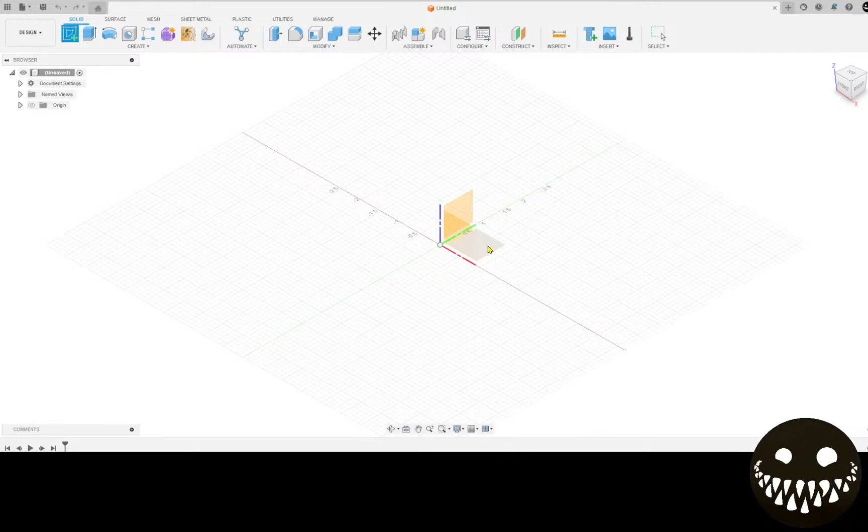of the X's showing. Alright, we're going to just go through adding some text to some flat planes in Fusion 360 here. It'll kind of cover all of this. Alright, yeah, we're all up to date. Perfect. We'll start by creating a sketch in the XY plane.

And, excuse me. Of course, as soon as I start talking on the mic, I get all choked up.

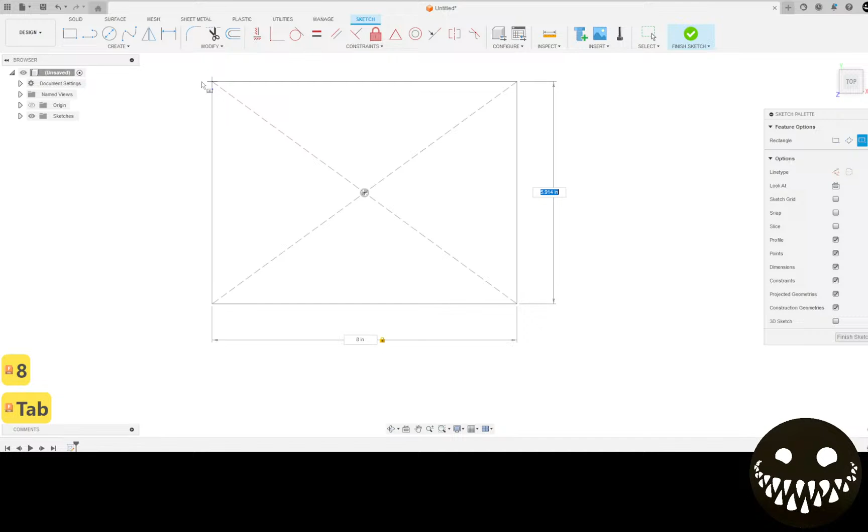I'm going to do a rectangle and then go over here into my sketch palette and use center rectangle just to create a box. I'm going to use some random numbers, 8 by 6. You can see my keystrokes are highlighted on the left hand side if you want to see some of the hotkeys I'm using.

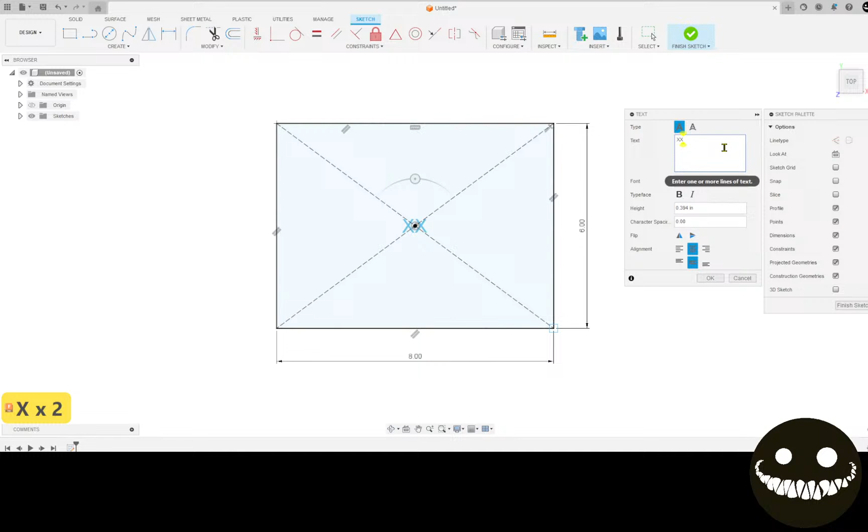Under create, I'm going to go to text. I'm going to put that over top of this. And I can center that text. And we're going to go XXX. We're just going to use Arial. Let's make the text height a little bit bigger, and give it a little bit of spacing. Perfect.

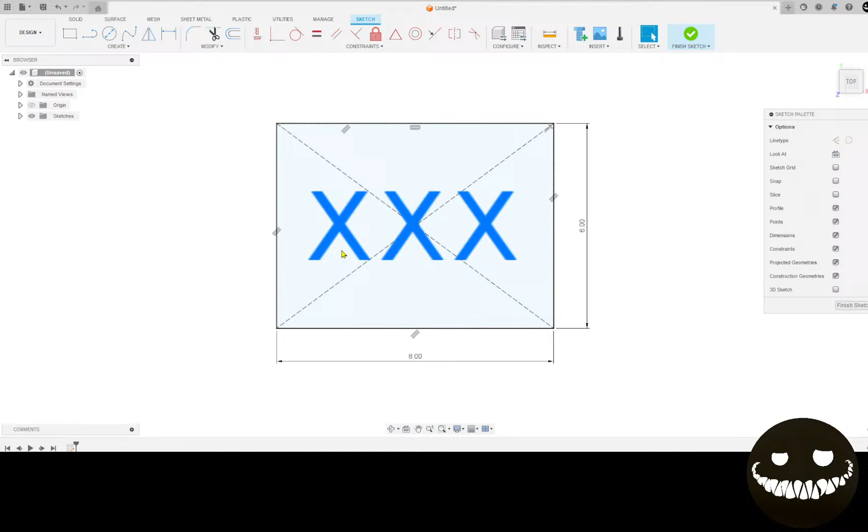Okay, so there's a few different ways you can go about this, depending on whether you want to be modifying this or not. Let's do one method to start with, which would be right-clicking on here, explode text, and you can see they show up in green, which is locked sketch lines. We can unlock those lines by selecting all of them and using the fix/unfix tool. Sometimes it doesn't do it the first round and you need to use that tool twice,

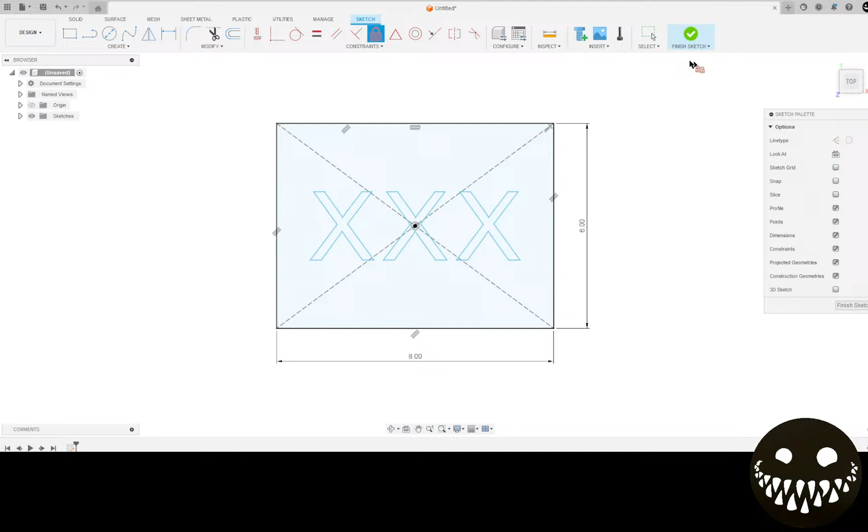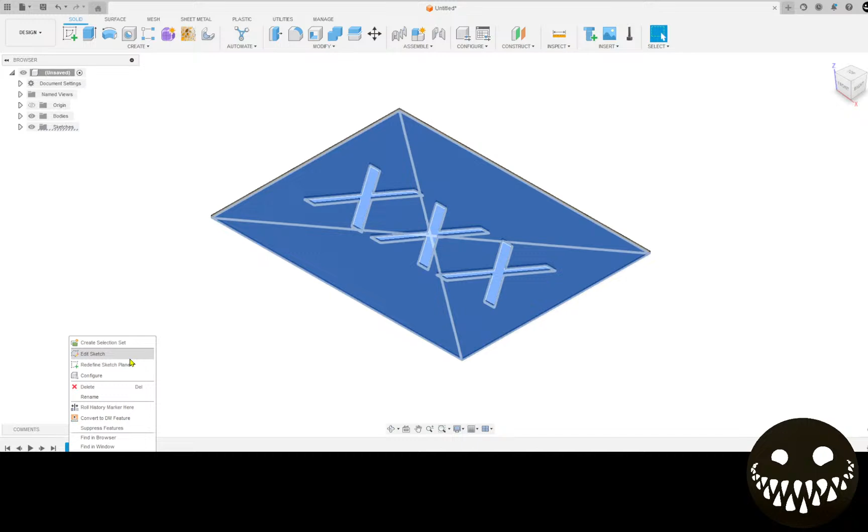and from here you can manipulate everything you would like, or it's created a solid profile that we can now hit E for extrude and extrude to the thickness of 14 gauge, and that works out for this font. The one disadvantage of doing it this way is that you can't change that font easily later, because if you go back to edit sketch, it's a shape now, it's not a font menu anymore.

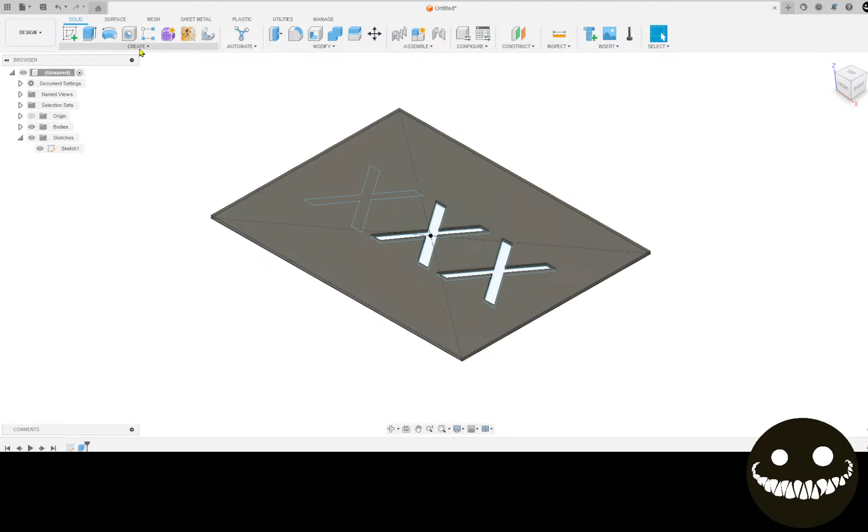Alright, so let's say I'm going to finish this sketch. Let's say one of these didn't show up for some reason. You can go back into your sketches here and you can either edit, or you don't need to edit it, but you can make it visible so you can see it. And now you can go into extrude here at the top left, or you can hit E for extrude.

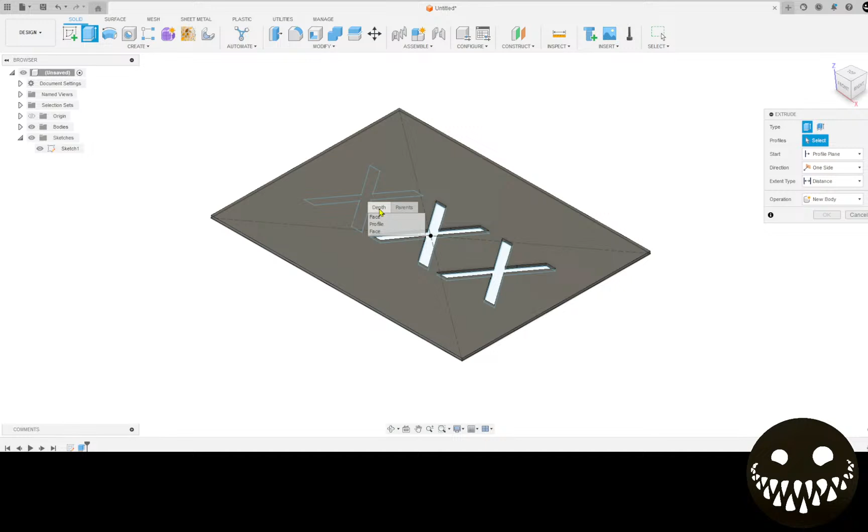And now, because that's at the bottom plane and the body is actually between you and that sketch, you can hold down left click for a second and it'll bring up every layer that's in between you and infinity. So there's the face, the profile, and the other face for the bottom side. So we want the profile, and now we can extrude that through in a number of different ways. But oops.

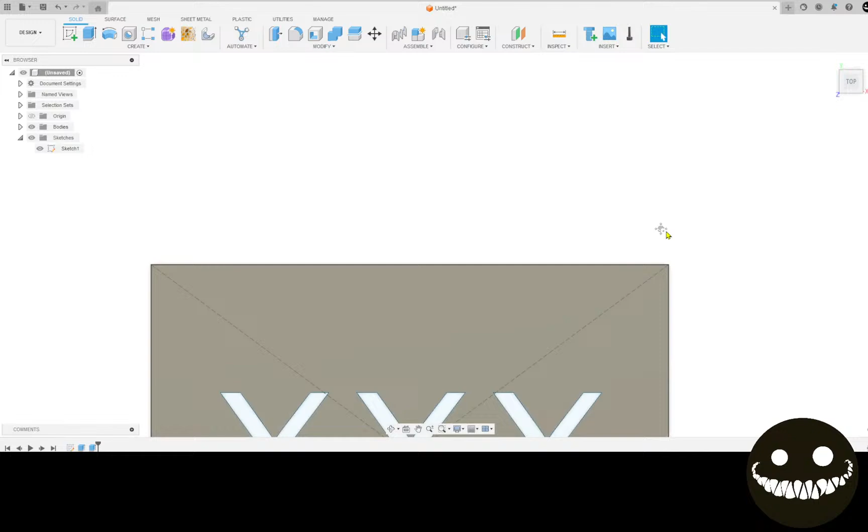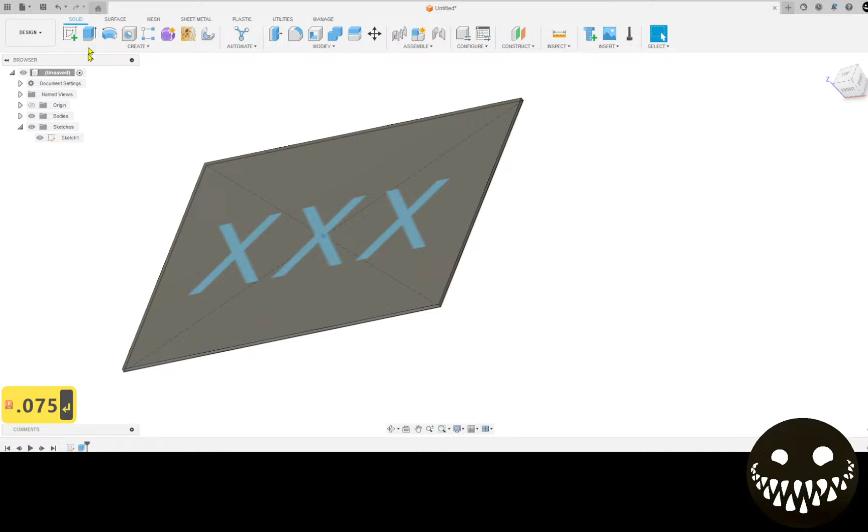All right, so another option we have here is we're going to go back in time, back to just being sketch text, and we can extrude this body to the thickness of 14 gauge. We can look at that sketch again. Now we can hit extrude again, and again we can hold down left click and it brings up the option for sketch text.

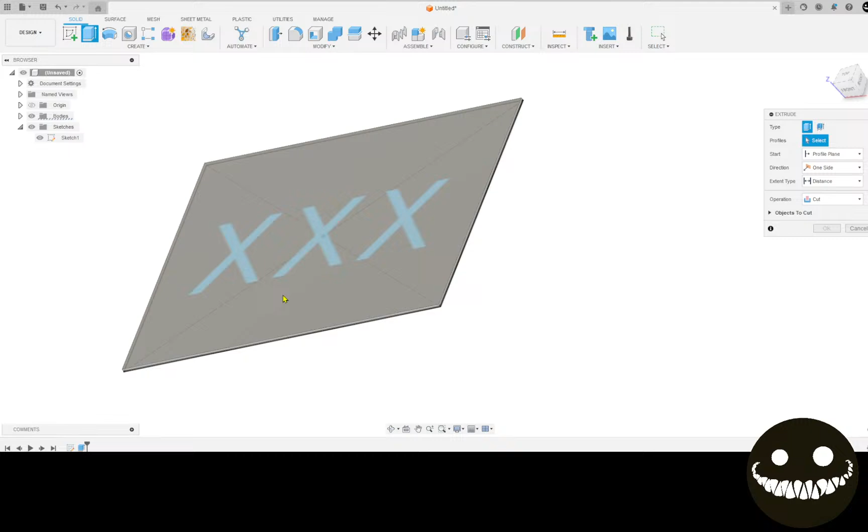Alright, and under operation we're going to do a cut. Oops. Not two profiles, I just want the sketch text. Oh, come on. Anyways, I'm having a fight here with this now. Sketch text. Target body, no target body found to intersect. I keep accidentally selecting the other one. Anyway, sketch text. I don't know why it's going down, but we want to go up.

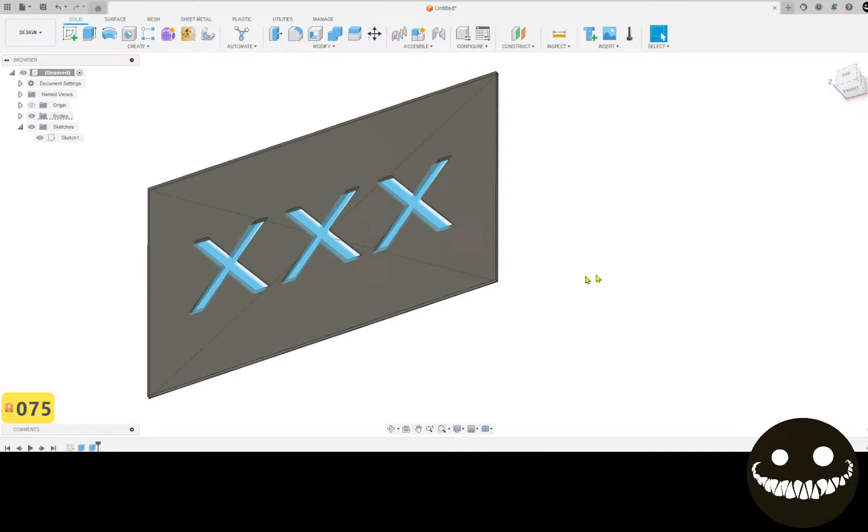Now, the advantage of doing it that way is now we can go back to the sketch menu and we can double click this and it's still text.

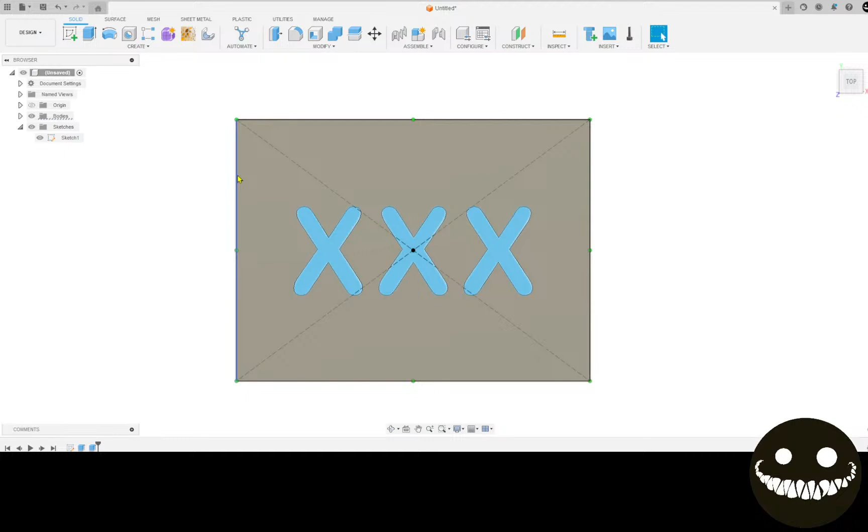So we can now go through and let's say scroll to Arial Rounded. We'll finish that sketch and it has updated this now to that Arial Rounded. If I go back again, go to edit sketch, double click on this and switch it to whichever I feel like, even one of the stenciled ones.

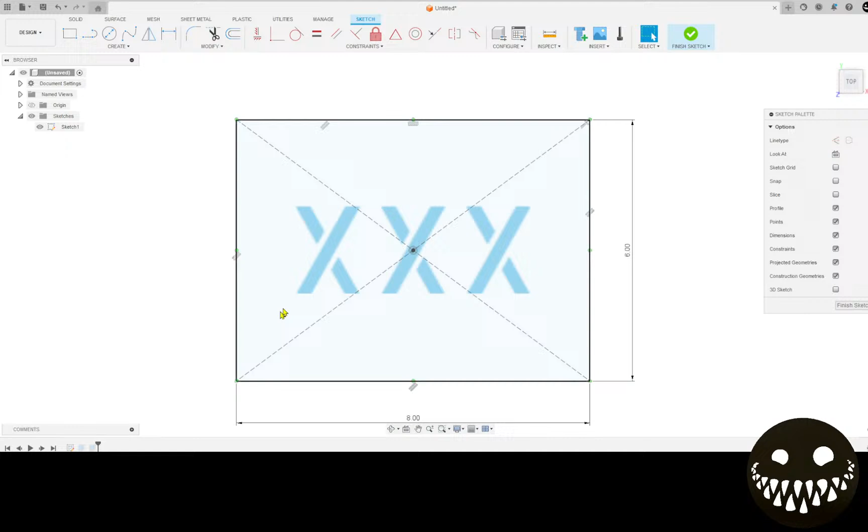I know it's ironic to stencil the X, but that's a huge advantage of doing it that way. You could go in here and you can change the height and it's still going to keep updating

because it's text, not objects or sketch objects. Perfect, and we might as well just run through it from here. So let's say we now went to manufacturing, going to make sure we're in the fabrication tab. We're going to start a new setup, and our setup is setting up our relationship between the material, which is the golden outline here, and the work being cut.

Or I should say the work and the object being cut. So right now our home point for this, which is different from origin on the model, this is our origin in relationship to origin in between the machine and the work and this project.

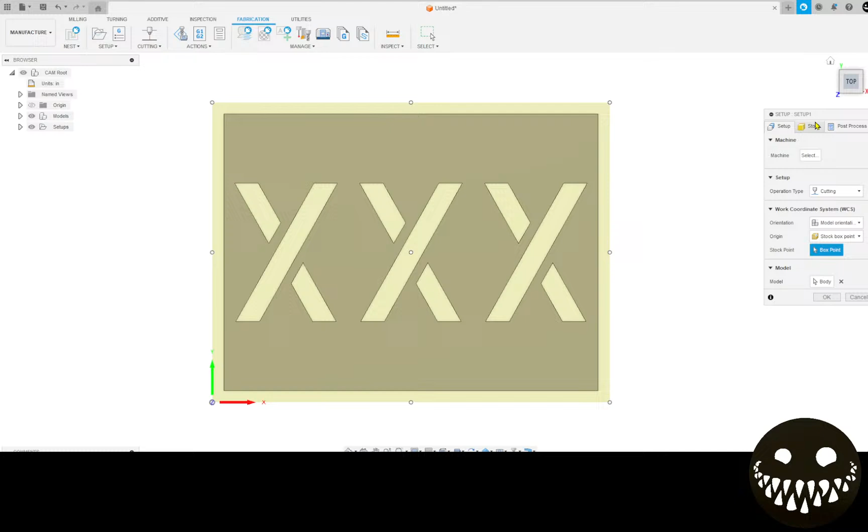So usually for Langmuir we're in the bottom left hand corner, and there's a few options under stock. Like right here I have an automatic offset from that corner of 1/4 inch, but you could set it right to 0 if you have some kind of indexing. That'd be fine. And this is where you can also add a name that'll come out in your G-code at the end without having to remember to re-enter it.

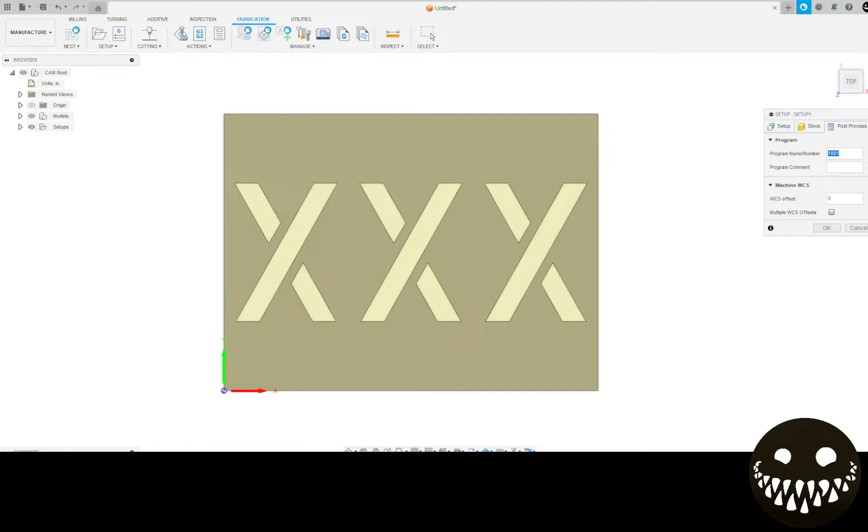So you could go for example here. Perfect. So now I have that in my setup. I can go up to the 2D profile, and this is where I'm going to be selecting cutting tools.

I guess I could go through making one up. Let's go into our local library that's on our computer. And I have all sorts of different tools in here, but let's create one from scratch by using this plus icon. I'm going to go down here to cutting plasma.

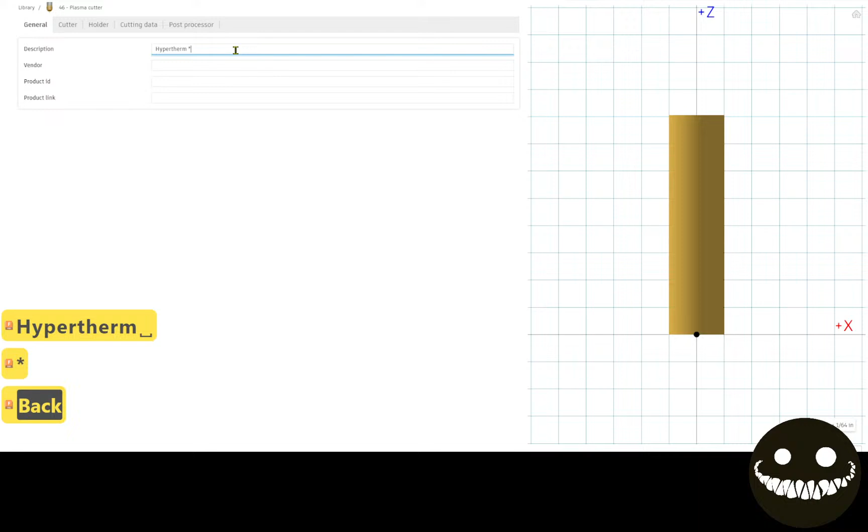And there's only so many actual line items we need in here, but let's say it's a Hypertherm 85. And actually I'll put it in front of here. We're going to be using 45 amp standard consumables, standard. I don't know what that means.

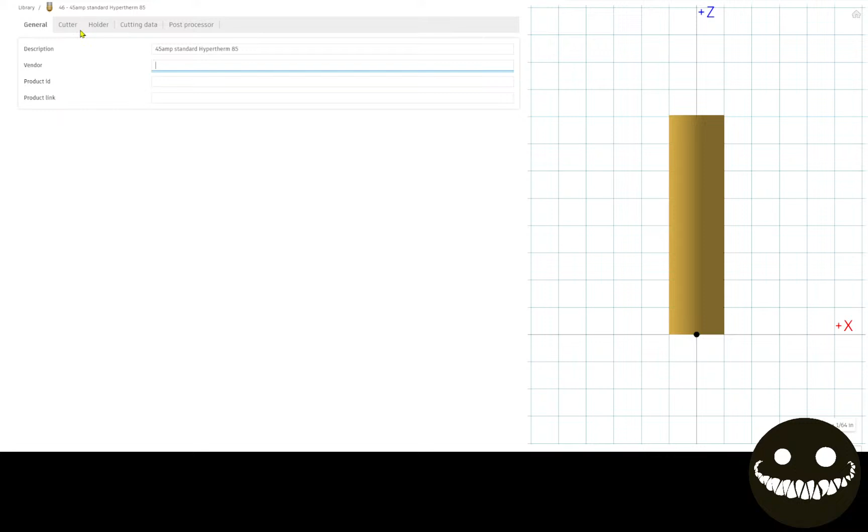And we really don't need all this stuff. You could put it all there if you're reordering from the same place or whatever. Okay, for nozzle diameter in the Langmuir instructions, they do say 1 inch, which is, I think it's basically talking about like the barrel from here to here on the torch. We don't want that because the simulation in Fusion 360 picks up on that for some reason since an update last year.

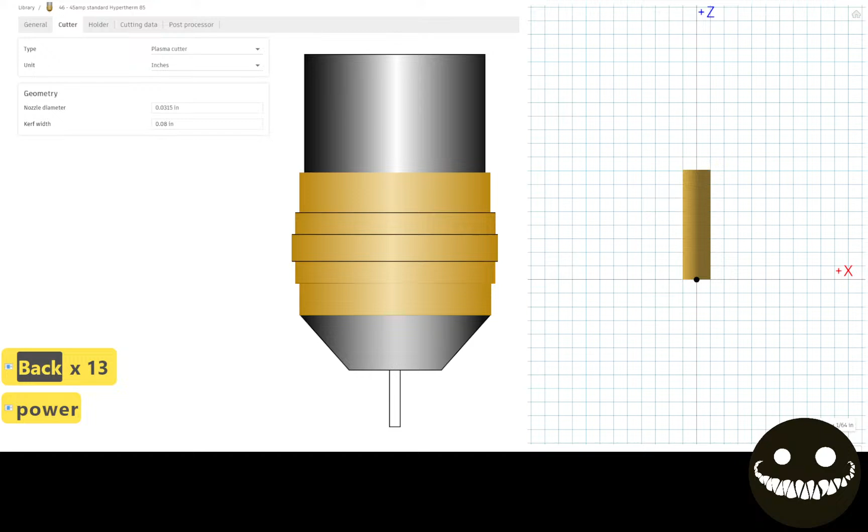So we're going to just put in whatever the kerf width is. So let's grab that manual. I happen to have that manual on my computer.

All right. So let's get down to the cutting charts. And let's say we're cutting this out of, well, we already said it's 14 gauge, but let's find that here. And we'll set that up.

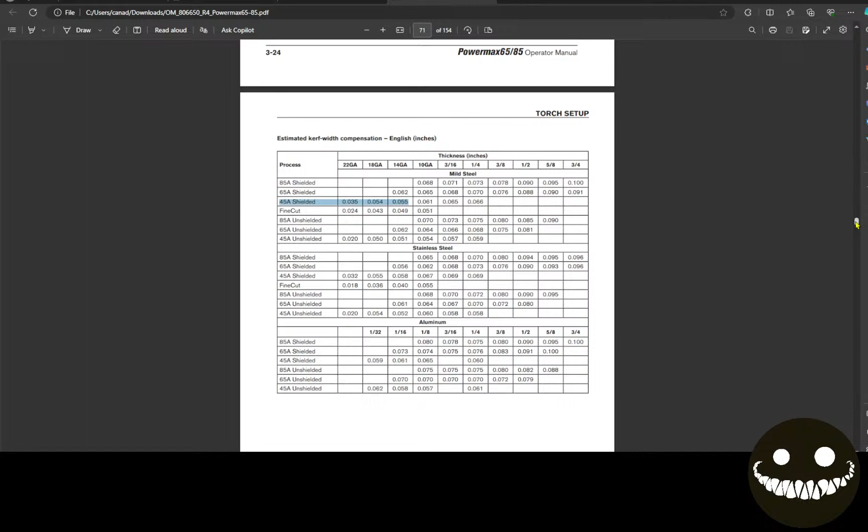All right. So these are our estimated kerf widths. We're going to use 45 amp, let's say shielded consumables, I think that's what we wrote there. It is 0.055 is kerf width.

And we'll actually just scroll down to the cut chart, which is right here for mild steel. And this is the line we'll be looking at here. We'll just refer back to that in a second. So 0.055, because we'll make that nozzle diameter the same as kerf width, 0.055.

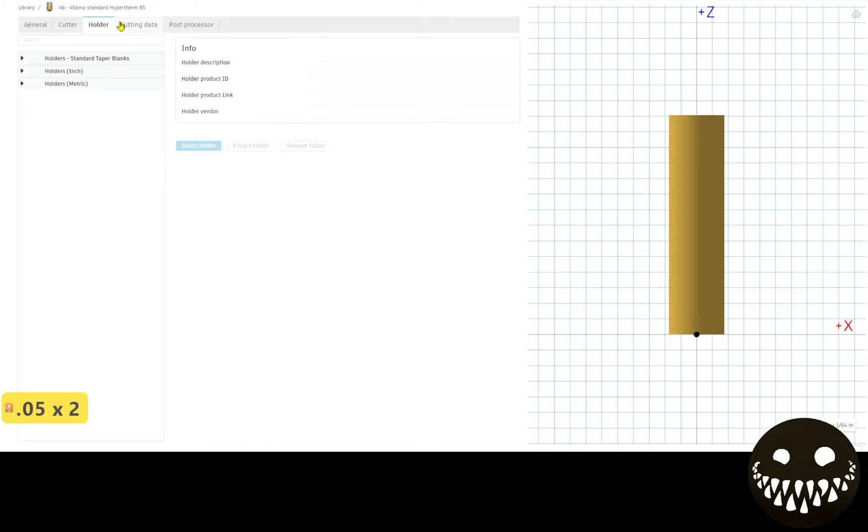Holder, we'll just leave everything the way it is. Under here, we can put in our feed rate and some of our other recommended information. Let's take a look again.

So it does show our torch to work distance or our cut height. It shows our pierce height here, our pierce delay. There is a difference between, I think the XP is a little faster latency wise than the Pro. So usually you start at 0.5 with the Pro. It says we can do 270 inches a minute and our voltage is 130 for that.

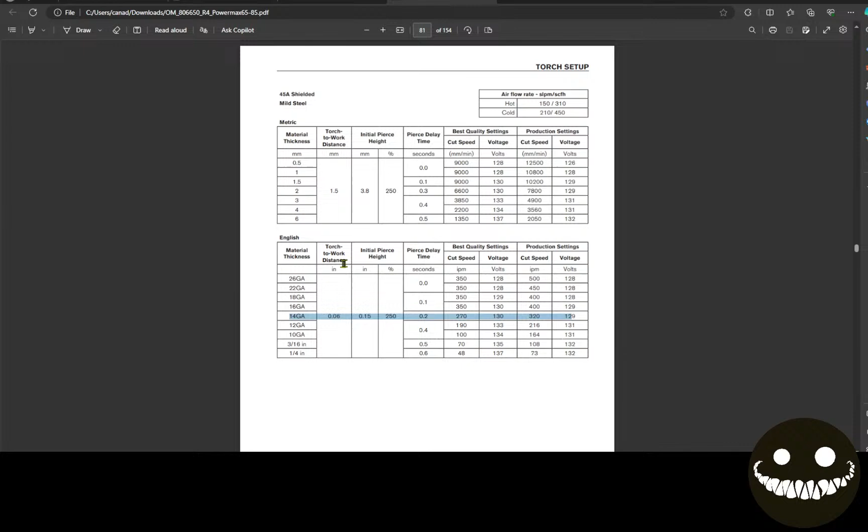So let's go back to Fusion. I'm going to put in our cut height, pierce height. These numbers actually don't move forward right now, you'll have to re-enter them at the end. But one day if they do, then you won't have to be messing around with your tools. And it's easy enough to just put in there.

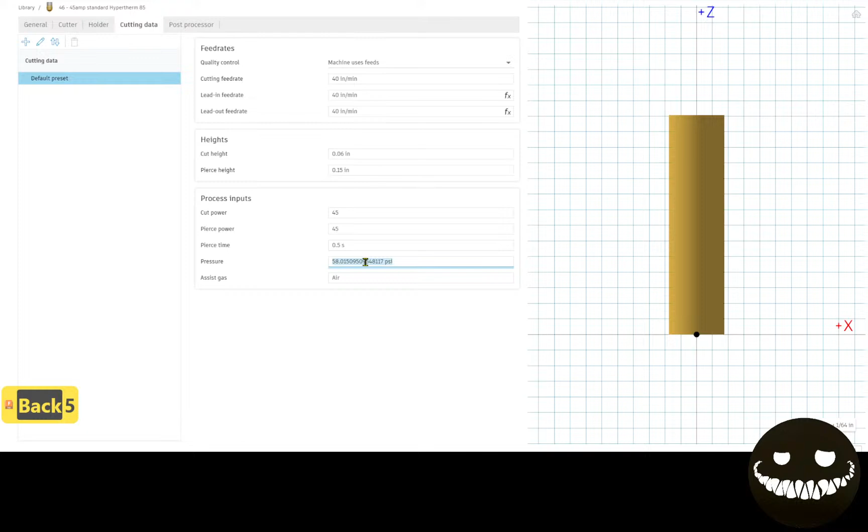I'm just going to put 0.5, 85 psi of air. And this post processor is basically just the tool number, and we don't mess with any of this. And we're going to say accept. So there's our new tool. I actually got the feed rate wrong there, so I'm going to actually go back in there and edit it.

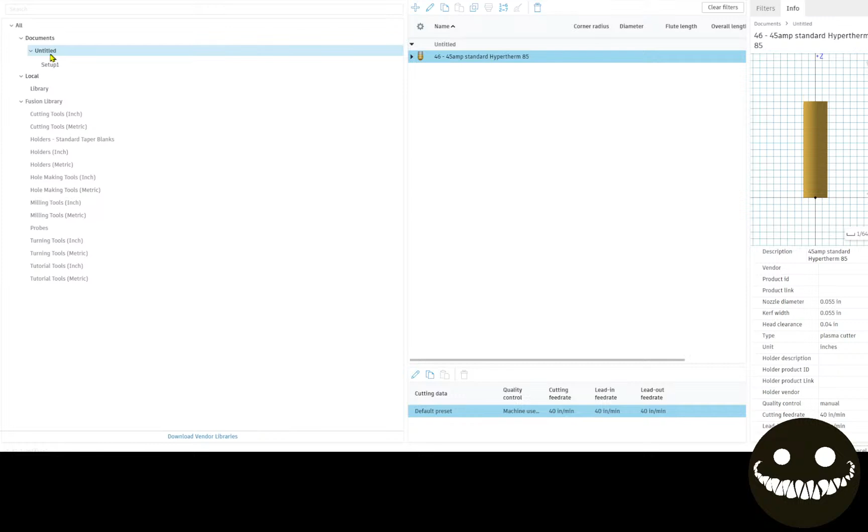Alright, so I'm going to cancel that because I'm actually editing the document version of that, which is attached to that setup. I'm going to go back and edit it in the library itself.

I should put this at 270 while I was here. All right.

Now I can simply click this face, the face contour, and it will know to select all the inside and outside without being on the wrong side.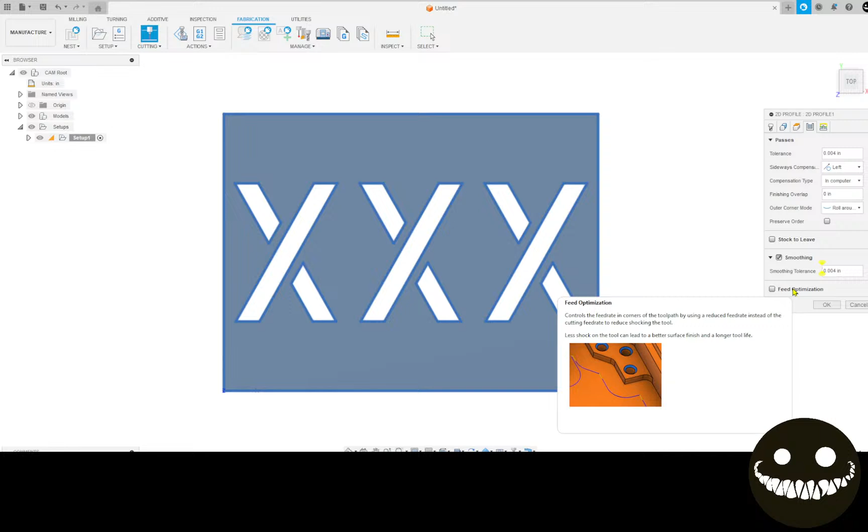Now I like to always reduce the tolerance by 1, add some smoothing. We're not going to do any feed optimization right now, but that's where it adjusts the tool path feed rate to have the torch be able to get the finer details of corners and such. It shows an illustration, basically with milling, but it shows an illustration of kind of how it works. With this, we're not going to need it.

So let's go to lead-in radius. Just put a small one on here. I'm just doing kind of a minimal lead in on these. All right, and this is preferred lead in position. So if you had a back part, if this was going to be a bottom that you weren't going to see, you could say, hey, I want the lead in to start there.

Let's add feed rate optimization just to go through that. So this is like the maximum deviation angle. It will apply feed rate optimization to it. So obviously this is well over 25 degrees, so it would start slowing the torch down before it hit this corner.

And how is the best to explain that? As the column of plasma is moving, or the arc is moving through the material, from where it enters the material at the top and where it exits the material at the bottom, there can be a little bit of lag there. The lower portion will always be at least under or trailing the upper position of where the torch is. So the idea of the feed rate optimization is it slows it down so the lower trailing edge of it can catch up, and it can be more perpendicular before making that more significant change in motion.

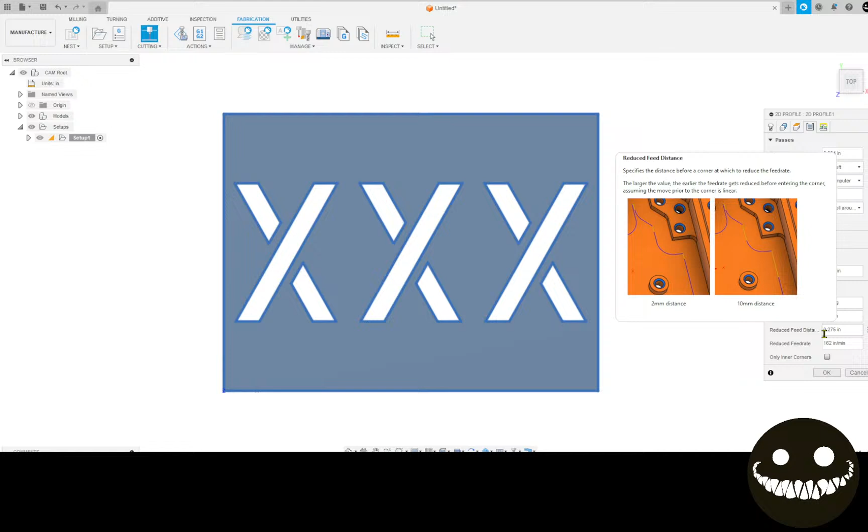So these are just some of the constraints for that. One is the maximum direction of change. One is the maximum reduced feed rate for this kind of radius. And then the distance, how much do we reduce that feed rate? So like the length before the cut, it starts reducing the feed rate, so the column of arc, or the plasma arc, can become more perpendicular before making that change. And then the amount of feed rate reduction you want, and typically it's about 60%.

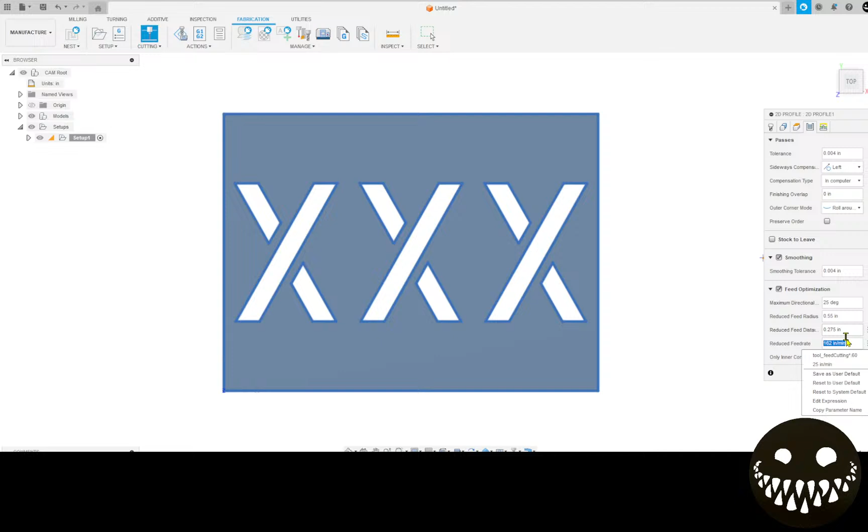I wrote it because you can write formulas in these just like you can in Excel. So I have mine as cutting feed, or tool feed cutting, times 0.6, so 60%. So it reduced it from 270 to 162 automatically. So if I made slight changes with the other one, it would update this one with that rule in mind. But you could write in a predetermined amount as well.

Okay, so we'll move to linking. I think we went through all that. Let's process this. So it's made us a toolpath here. And then if we go and look at a toolpath...

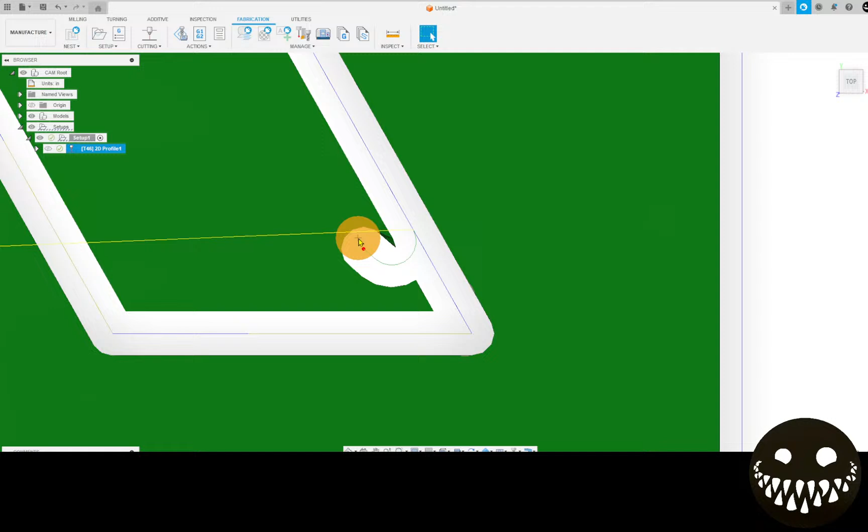I have no idea why, for some reason in my head, the beginning should be a green dot and the end should be a red dot, like start and stop, but it's not how it is in Fusion 360. It is red dot to start, because that's the way Fusion 360 likes to do it. So it's showing this green line to start with, which is the center of our cutting path.

This circle and this swarf here, or kerf here, represents the kerf. And this green line is the lead in. So this is the lead in length to here. This is the lead in radius. And I did it a radius of 160 degrees. And I did that small little lead in and then the lead in radius. And this is obviously the radius that it's coming in. And now the blue line is standard rate of motion feed rate.

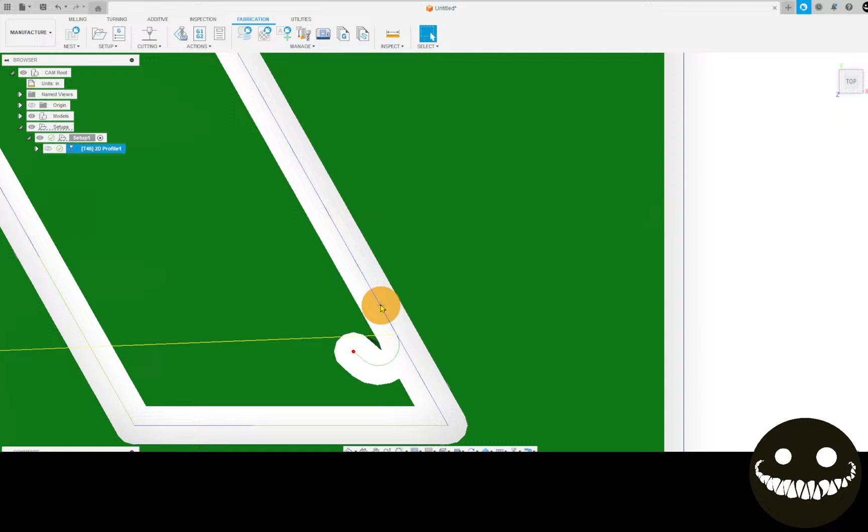You can see our actual cut line is on this side here, and how it compensates for where its travel is against that to make up the difference. That's why the kerf width is so important. So it's going to go around here, and now we can see our reduction.

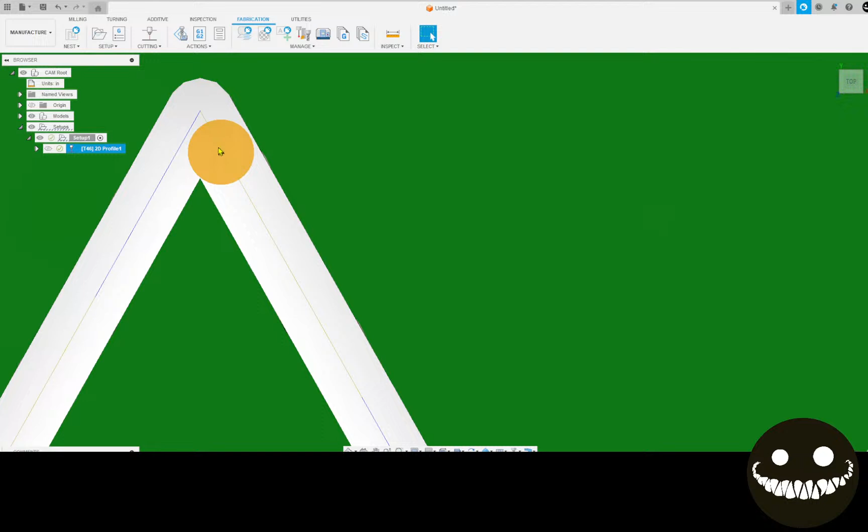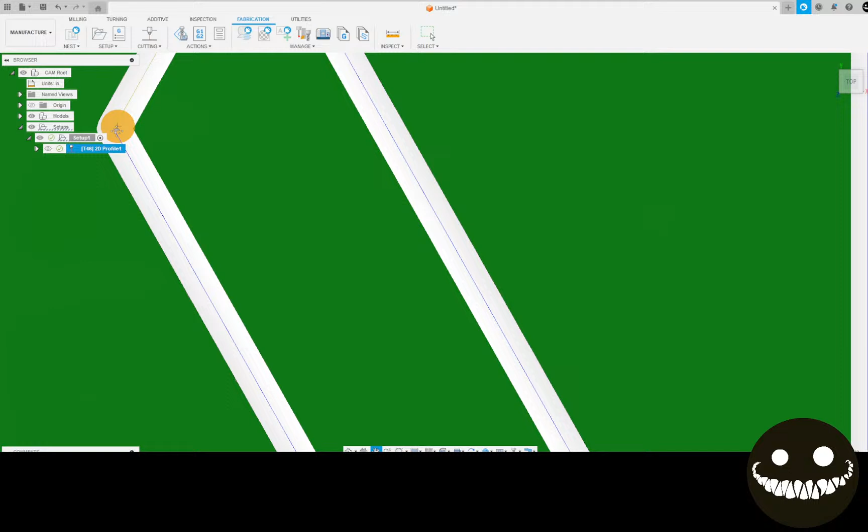This was that 0.275 inches of feed rate reduction. So the torch will start slowing down here before this corner, and then as soon as it gets to the corner, it goes automatic full speed again, that 270 inches per minute. And now right here it slows down to that 162 of optimized feed rate. Now once it gets to this corner here, it does the same thing, slows down, speeds back up.

Sorry, that phone threw me off there. Now just before this corner, it does the same thing again at this corner, applying that feed rate optimization.

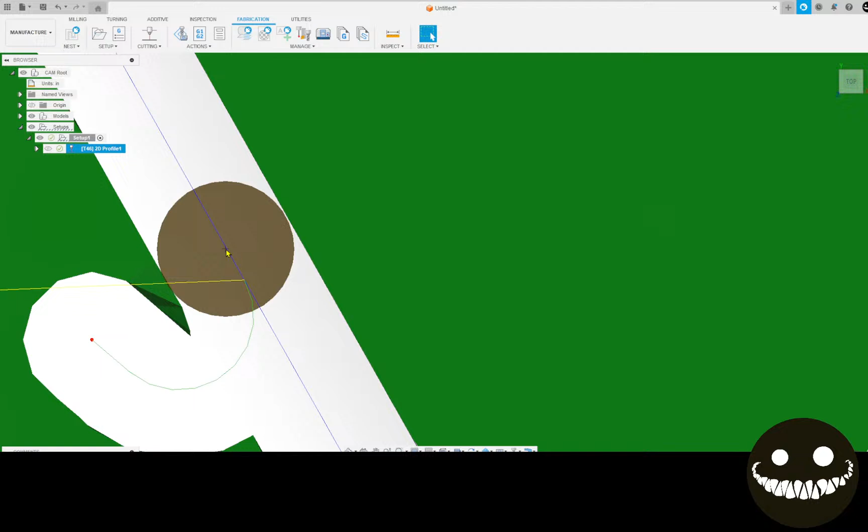Oh, I didn't do a finishing overlap, but you can have it cut a little beyond the starting point or the first entry point of the cut into the finished material, which helps smooth out this little area here, which I probably should have added. I'm going to go re-add it right now.

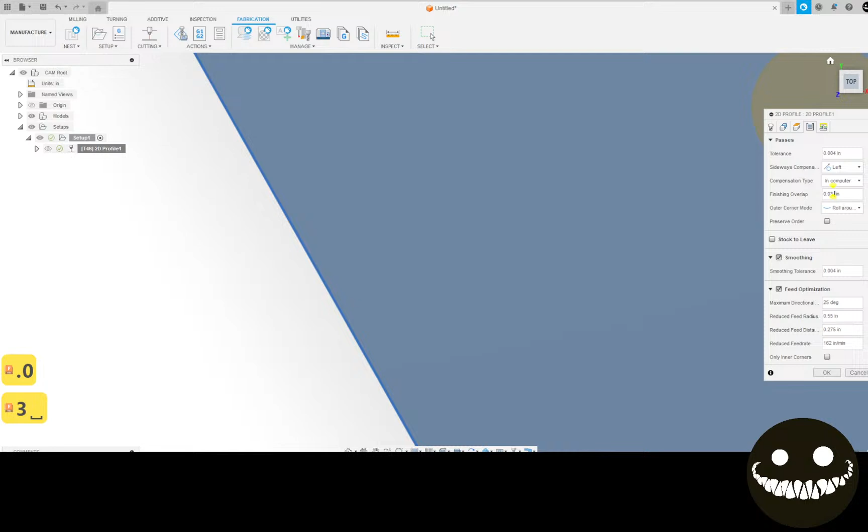So you can go in here, go edit, and under passes, that is called the finishing overlap, and I'm going to just put in a micro finishing overlap of three thou.

Oh, let's edit and reload. I might have done it bigger than a three thou there. Let's see. Huh. Oh, weird. Why all of a sudden with the finishing overlap does it not want to work out?

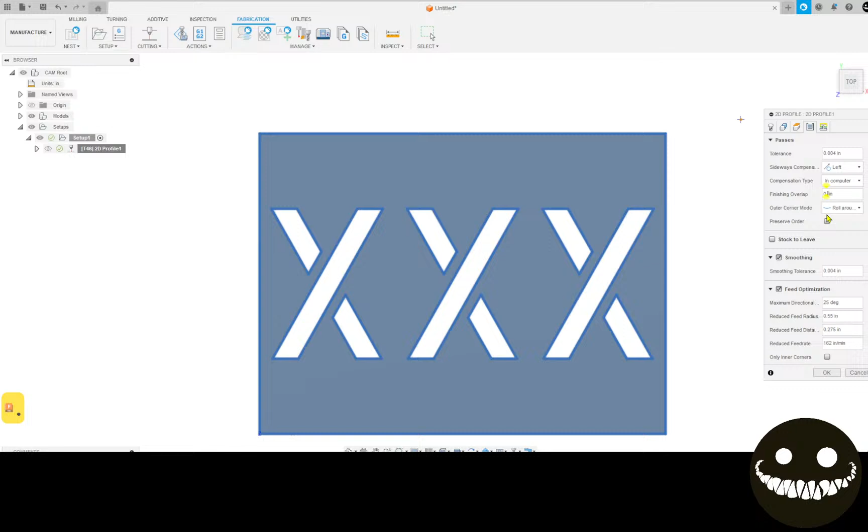This is the time when all this should happen. Okay, try the smaller one. Yeah, well, it's not liking that. Let's just try a different angle, see if that helps.

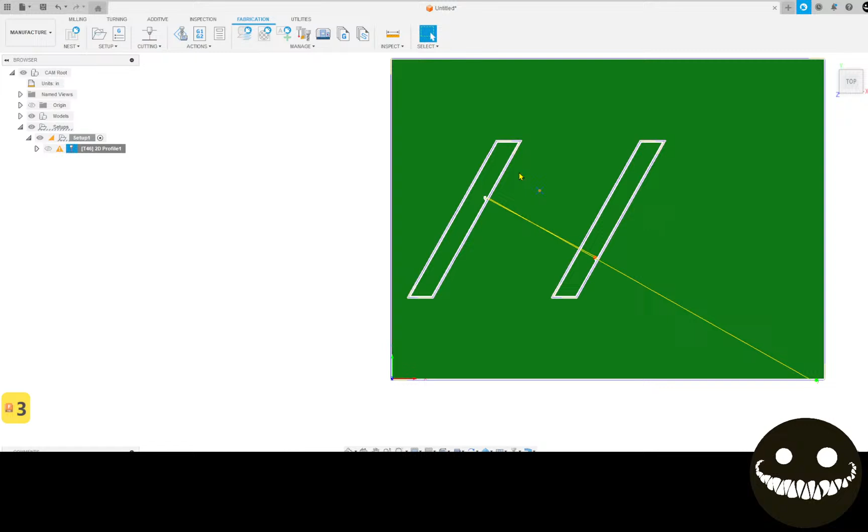Isn't that weird? Okay, well, let's ditch the finishing overlap because that's not really the theme here. That works 99% of the time, every time, typically.

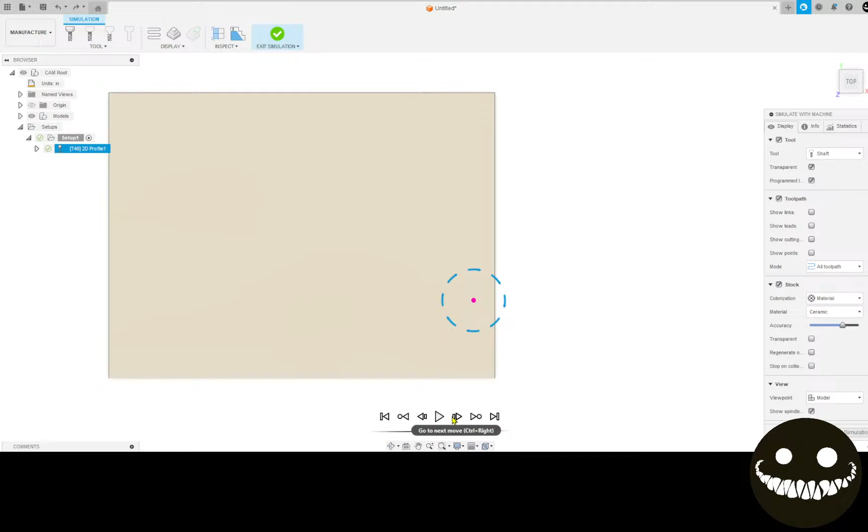Okay, so now we've got some tool paths. Let's go to simulation and take a look at how that's going to run. Let's run it really quickly. Perfect.

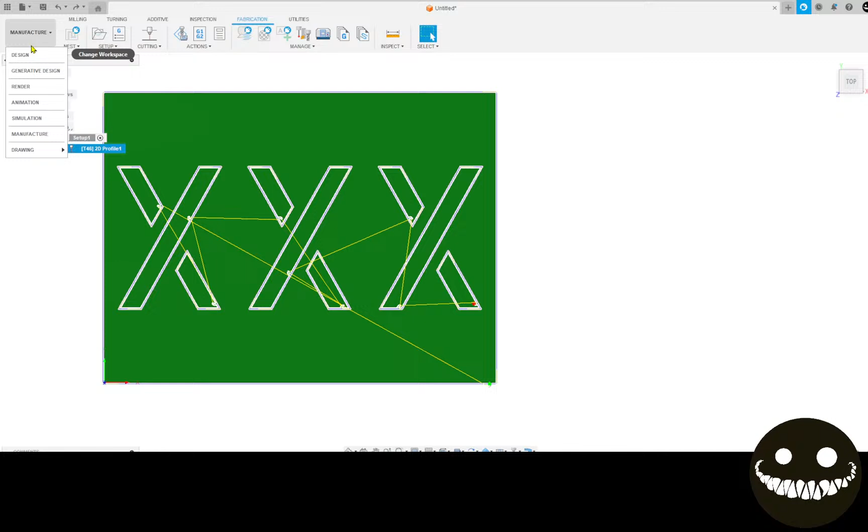Exit simulation. Now the great part of the way we constructed this project to begin with was once we go back here to design, we can go back to edit sketch and I can change these X's to whatever I want.

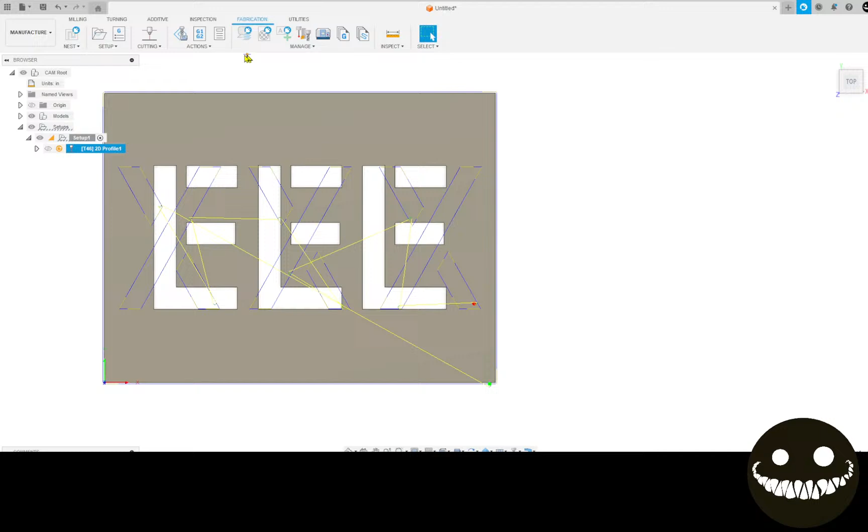And now when I go to manufacture, it's going to give me a warning. I can reload this. And now I have some new cut paths, and I can just simply go up here to NC program.

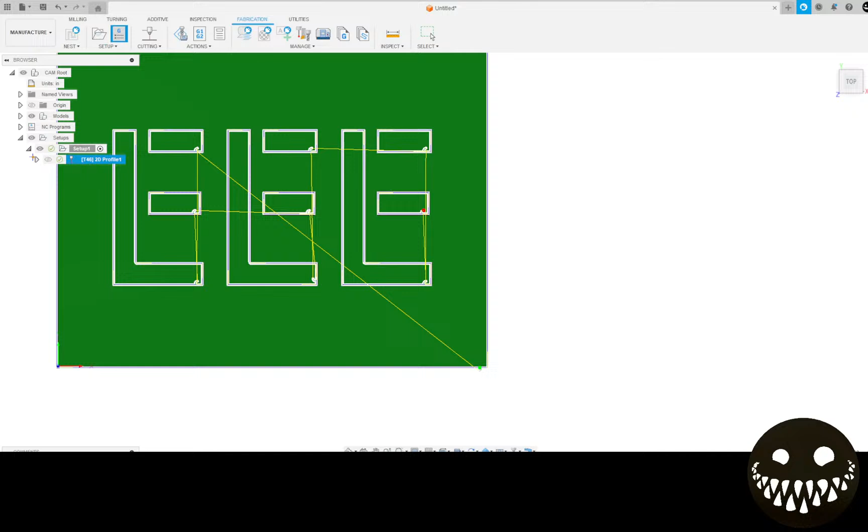Okay, and then I could go back here and just edit this a million ways and keep coming back to it. If I had some kind of plate that I was doing multiple font things in there, I could even add more letters and change it, and it's going to still work out.

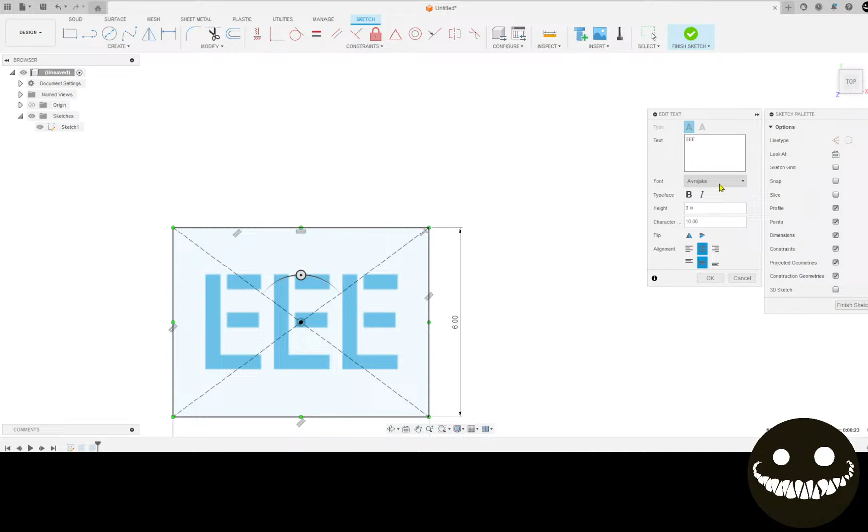Here, let's do something a little more extreme than just changing the letters. Let's go into something like this stencil here, and we're going to go, I don't know, Fusion. Let's make that a smaller size.

Actually, we don't have to. We can go OK, and we can actually make this a bigger size, plate to cover it. Oh, I don't know why that did that.

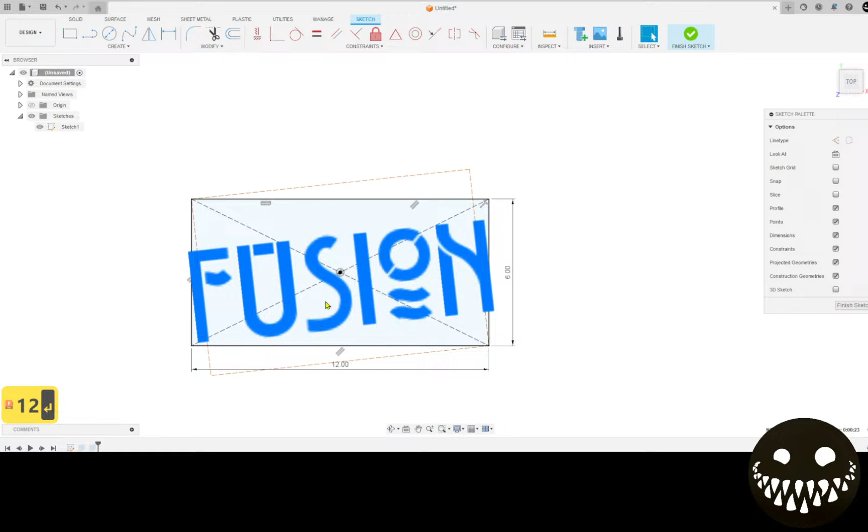Have some kind of constraint that's not liking that. It doesn't want to move out equally. I'm going to do it like this instead.

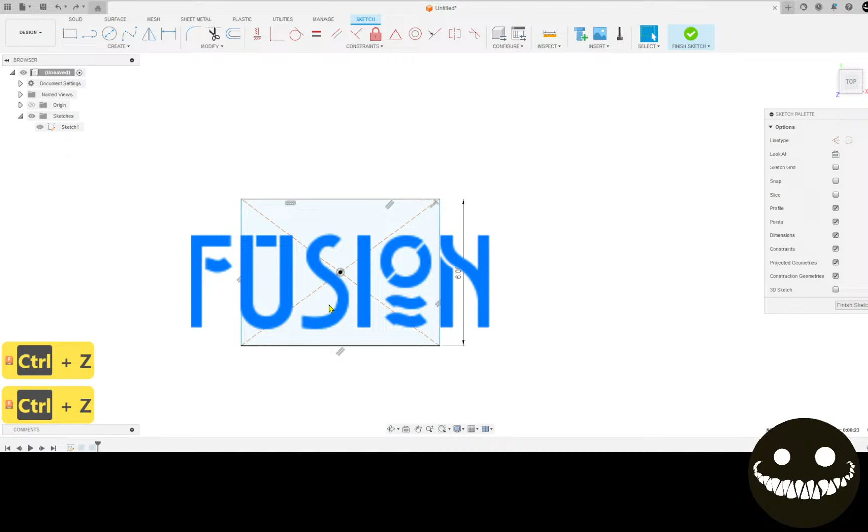Move. Huh. Interesting. Some way the sketch is attached to that. Anyways, I'm not going to deal with that right now either. Fusion's great, except sometimes it can be frustrating.

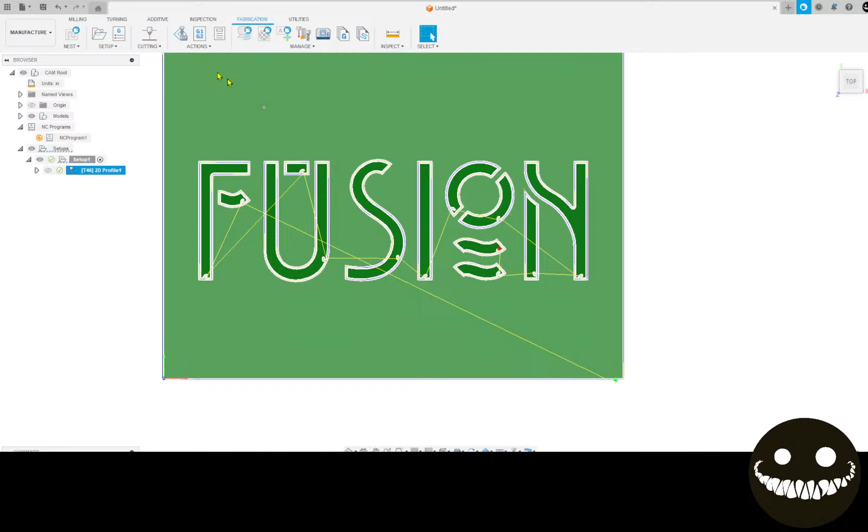There we go. Now, let's go to Finish Sketch, and we're going to go to manufacture. This gives us that warning again. I'm going to go and regenerate the program. And there we go. Gets all those pieces and run a simulation.

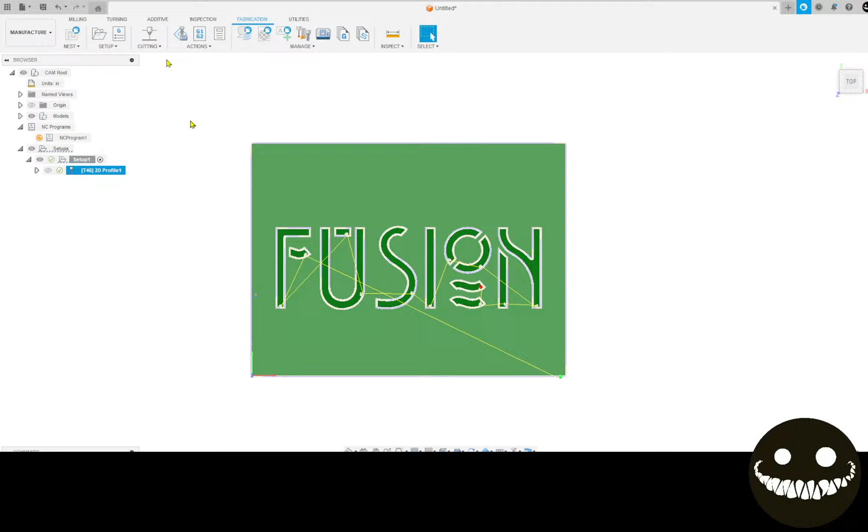Perfect. And we could just make new G code again. Could give it a different name so it doesn't save over. I wanted to show that one thing about the dotted lines.

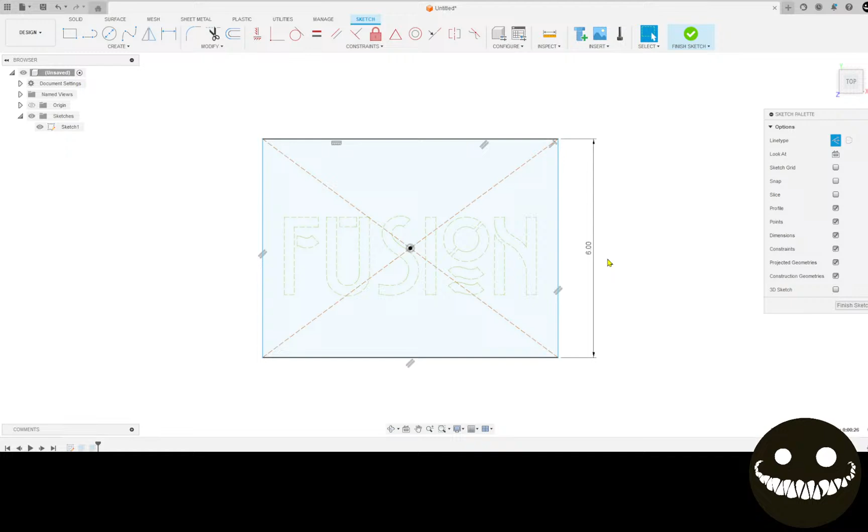So if I were to go into here and explode this, let's say, but I was to hit X first, so it changed my line type to construction, and then I went explode text, you know, I am not going to be able to extrude that because it's invisible to Fusion at that point. It's just a construction line, so they don't make solid planes or solid profiles.

Okay, well, hopefully that helps you out with fonts somewhat.